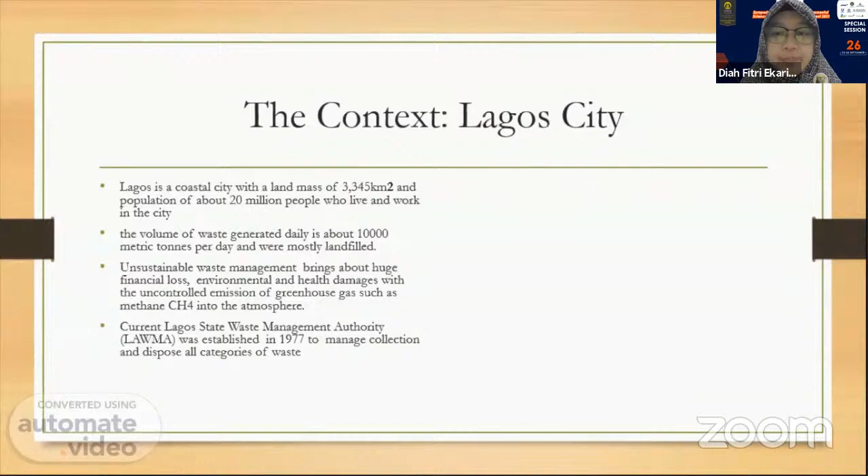Let's look at the context of Lagos city. Lagos State is one of the 36 states of the Federal Republic of Nigeria, and it is a coastal state and a coastal city with a population of over 20 million people who live and work in the city. The volume of waste generated in Lagos State daily is like 10,000 metric tons per day, and previously, most of this waste was mostly landfilled.

However, unsustainable waste management in Lagos State, Nigeria, brings about huge financial loss, environmental and health damages, with the uncontrolled emission of greenhouse gases such as methane and other forms of gases that tend to affect the environment negatively.

Because of that, the Lagos State government established what we now call the Lagos State Waste Management Authority, initially in 1977, preparatory to the popular Festac 77 - the Festival of Arts and Culture held in Africa with Nigeria playing host, and Lagos was the city of the cultural festival at the time. There was so much waste that the government decided to clean up the city, and so the Lagos State government established the Waste Management Authority in 1977.

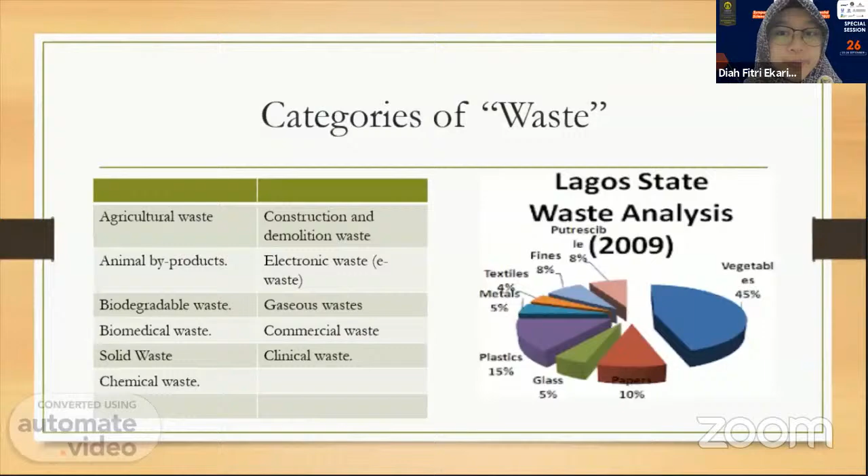This was generated by the Lagos State Waste Management Authority, with vegetable waste constituting 45%, paper waste 10%, then glass, plastics, metals, and textiles in that order. Part of the challenge we have in Africa, particularly Nigeria, is that the food culture tends to generate more waste than other forms. Not only that, industrial waste is high because Lagos is the most industrialized city in Nigeria, and therefore it constitutes the highest form of waste. Particularly, e-waste - electronic waste - is also rising on the horizon.

So, how do we now turn waste to wealth?

They have a lot of waste to contend with, particularly the food waste that are rampant in the society. So the Lagos State Waste Management Authority developed plans with manufacturers in the food and beverages sector to begin to convert the food waste into wealth. There's also the issue of voluntary waste reduction practices across all sectors that are going on.

But mostly the collection of waste from domestic, industrial, hospital is directly under the Lagos State Waste Management Authority. But because of the huge population of Lagos State and Lagos City, it has been so challenging for the Authority to effectively handle prevention, reduction, reuse, recycling, recovery, and the disposal of waste, which should just be the least consideration in terms of waste management.

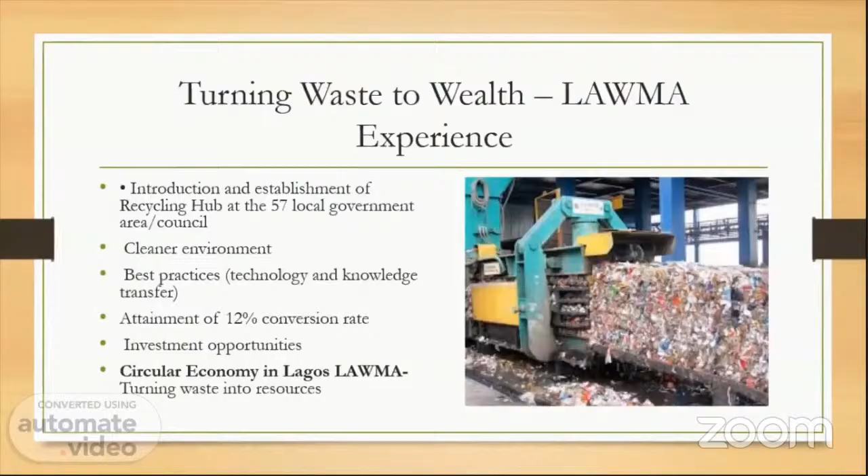And so you can see on my screen here a plant in the Lagos State that is trying to convert the plastic waste into wealth. So you see that this is taking place in some parts of the state, and therefore, the percentage of conversion is relatively low, with 12% conversion rate currently happening in the economy.

But the goal of the Lagos State Waste Management Authority is what we call the circular economy, and we are going to listen to a video clip on the circular economy in Lagos State now.

Look around you. There is waste everywhere you turn. From PET bottles to paper, we are surrounded by waste from products that we consume.

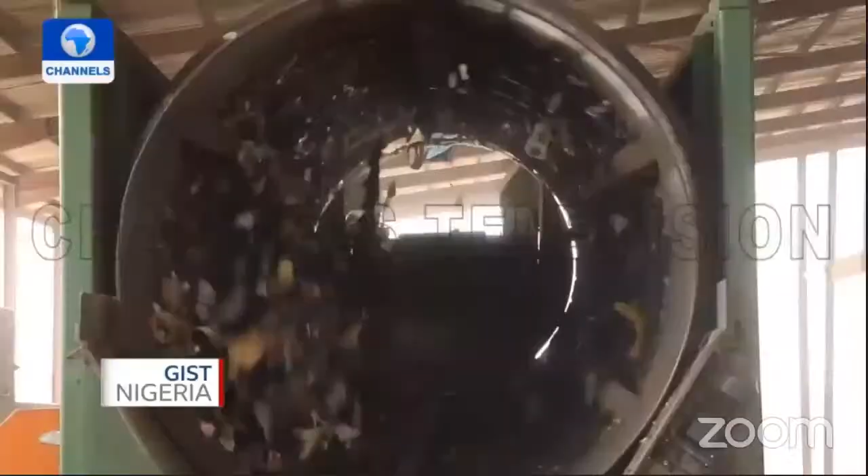The current thinking about product life cycle is fundamentally linear. Products are produced from raw materials, we consume them, and they become waste. Most times, this waste is not properly disposed. The ones that end up in landfills like these are unsorted. Some are burnt, polluting the air and causing danger to our health and the environment. Others, especially plastics, will take hundreds of years to degrade.

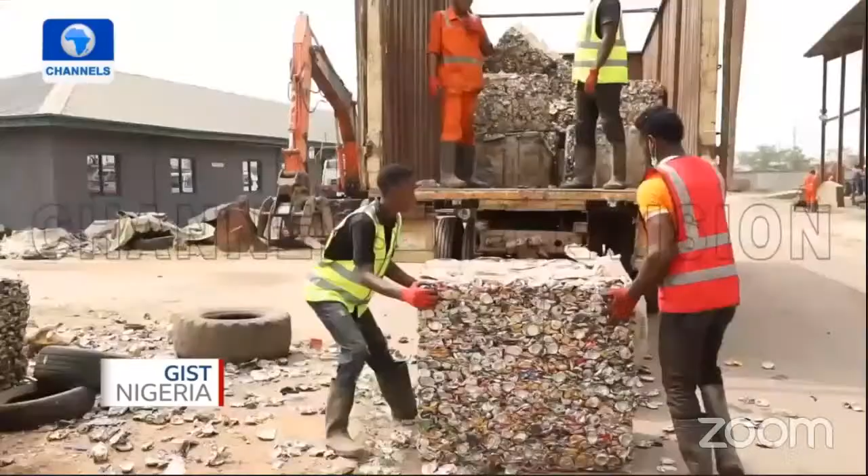But one Nigerian is changing the narrative. Lolade Oresonwo runs a UK company leading an effort to achieve zero waste at landfills in Nigeria. In the last 6 years, this facility has been putting back 1 million kilograms of waste into the production economy every month. Women form 70% of its workforce. It's not just creating wealth, it's actually solving an environmental and a health problem.

If you recycle the waste, then you don't have problems with leachates, with groundwater contamination. So it's a no-brainer that they need to start taking seriously. All over the world, this linear product life cycle is no longer sustainable. Products are now designed in such a way that they are cycled and reused, which means that your waste is a raw material for another product. The World Economic Forum estimates this new economy to be worth $4.5 trillion.

But the Nigerian consumer market today shows little signs of maximizing this opportunity. It is an absolutely huge business. As we stand now, we're creating jobs for at least 3,000 people. That is one company. Now imagine the amount of cottage industries that come out of this place.

What waste are you looking at over there? There's plastic, there's paper, there's metal, there is aluminum cans, ferrous and non-ferrous metals in it. And there is earth in it, earth that can be reconverted to compost. Why are we buying inorganic fertilizers when we can make organic fertilizers from our waste? What you are having is an end-to-end process that you don't even see waste. That is the idea of zero waste.

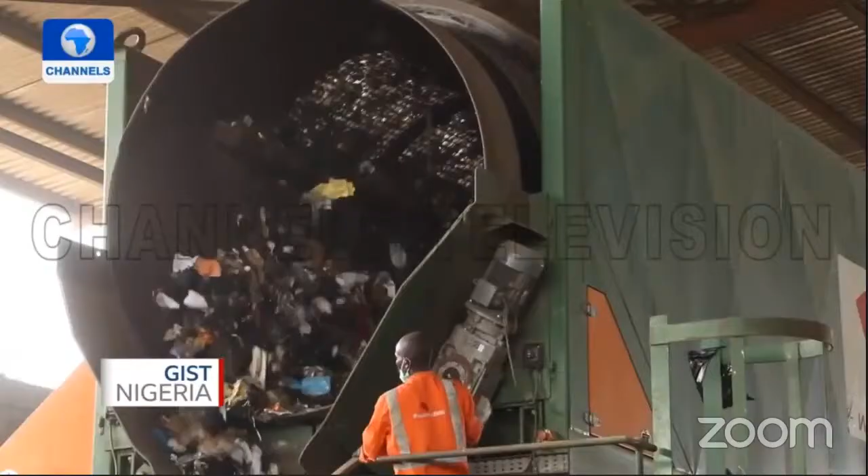In 2019, Nigeria, in partnership with Global Environment Facility and the United Nations Environment, launched a $15 million initiative to recycle electronic waste. While this sits within the circular economy approach for the electronics sector in Nigeria, there is no clear policy on whether such an effort will be extended to other sectors of the economy.

What are the benefits, key benefits of sustainable waste management?

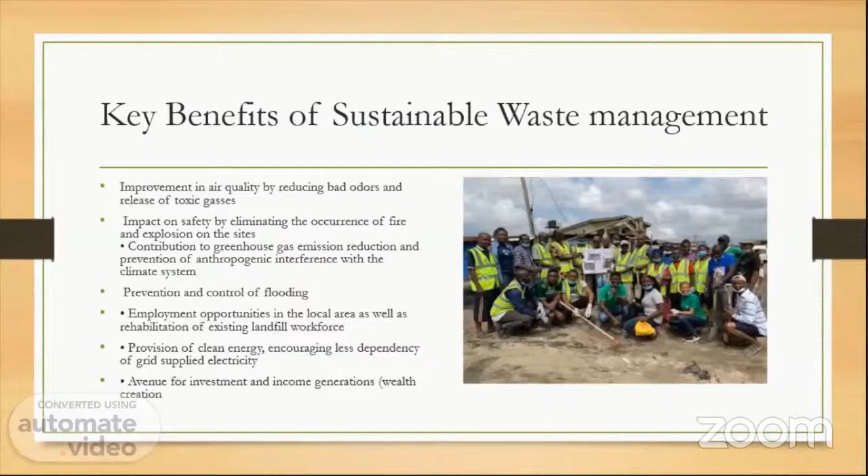By and large, waste management has high economic value. It contributes to the growth of the economy, and not only that, it also creates employment. It creates a friendly environment, and it brings about total well-being of man. And so if we can manage our waste successfully in this part of the world, then we are also creating quality life for the citizens and for the global community by extension.

Let's look at another video on how e-waste, particularly waste created through computers and so on, has been managed in Lagos State so that we can have a reduction of crisis in the environment as well as add to the economy of the country.

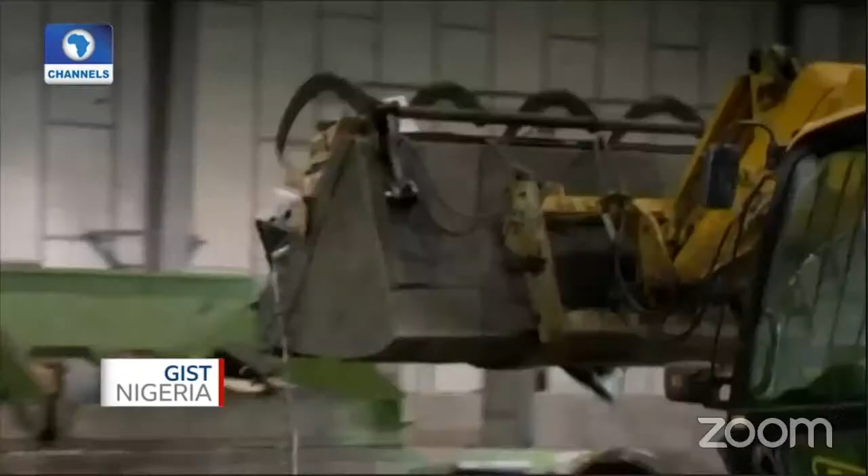According to the United Nations Environment Programme, over 500,000 tons of discarded appliances are processed in the country annually. In most cases, when the e-waste ends up here, residents who are out to make some quick cash scavenge the waste with their bare hands at the risk of their health. Up to 100,000 people work in the informal e-waste sector in Nigeria.

I want to meet Usman Sani, who has been picking e-waste off dump sites for 5 years. How much money do you make in a day? 4,000 naira. That's about $11.

So who do you sell all this to? A customer comes here and buys them from you. Even though this may not look like a very big business for scavengers like Usman, there are Nigerians who have made a lot of profits from electronic waste.

Isaac Egu is an e-waste merchant who has been in the business for the last 15 years. He depends on scavengers like Usman for his supplies.

So how big is your business? By this I mean, how many people do you have in your employ? I have like 10 people working with me, and they work from Monday to Friday. So on an average in a month, how much profit do you make in this business? I make like 200,000. That is more than $500. It looks like the country is gradually seeing the money side of the e-waste.

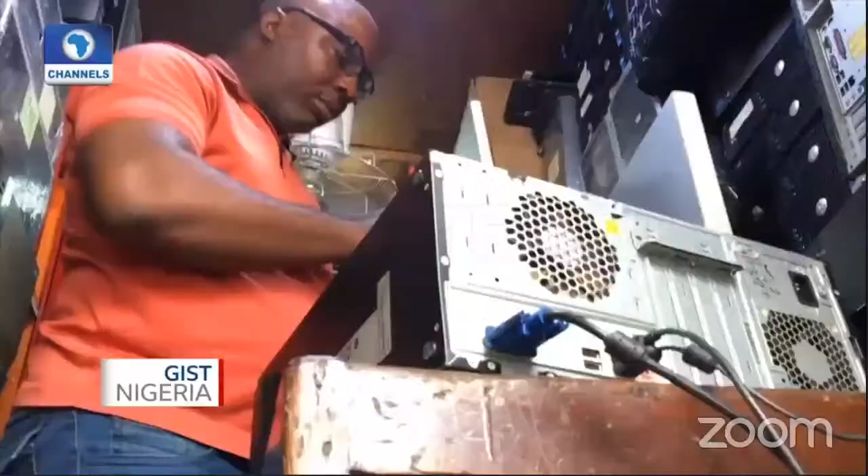With fast technological advancement making many of these electronics obsolete, chances are they would end up in a dump site. How much do people know about the economic potential in e-waste, along with the dangers associated with continuous exposure to such waste? There is no better place to find out than Nigeria's own Silicon Valley, known as the Computer Village in Lagos. Maduka Anthony has been selling and repairing old electronics but has no idea how big the business of unusable electronics is.

How do you dispose of your electronic waste? We don't have any specific or defined means of disposing of electronic waste. The only people we dispose it through are those, I'll call them cart pushers. They normally go around asking for scraps, those that we are unable to fix and get working again. We sell it off to them at peanuts.

Now, are you also aware that this e-waste can be mined for precious metals like gold, silver, copper, platinum? Not really. I'm not much aware of it.

Apart from some of those cart pushers, most of the time after gathering this waste, they have a dump ground. After gathering those stuffs, you see them in the evening extracting some vital components from it. While many developed countries are shipping their e-waste to less developed countries, some business-minded people in countries like Nigeria import the e-waste for its economic value. Kunle Falai, BBC, Lagos, Nigeria.

Ultimately, our goal is to have a cleaner Lagos and also a cleaner global environment. However, there are certain challenges that mitigate against effective waste management in Lagos State, as in other African countries. One is the control that the government holds, not having the right enabling environment. There's also the issue of growing population, not to talk about the paucity of funds created by the economic crisis in the system, and lack of access to equipment or capital to enhance a quality environment. These are some of the challenges, and it is believed that if we effectively provide policy and support, we can effectively manage waste.

The application of blockchain technology in space activities can be carried out in the following areas: financing of space startups and asset creation, tokenization of space assets not for investment purposes, tokenization of requirements for data of remote sensing of the Earth, information management on the full cycle of a space mission, secure satellite communication, creation of virtual security zones of different levels, public procurement in the space industry, and ensuring cybersecurity of space assets through supply management.

According to the carried out content analysis, it is possible to build a classification of environmental risks arising from space activities. Four groups are identified.

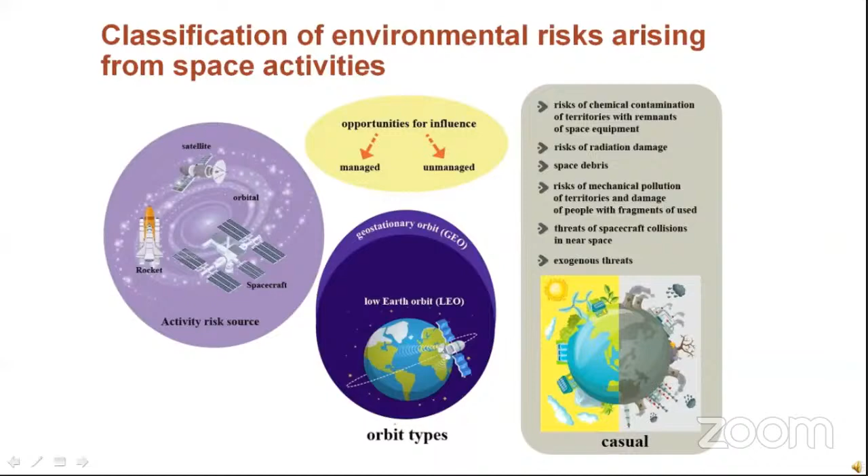The problem of space debris is gradually becoming increasingly important for the future use of outer space. Many simulations based on evolved modeling assume that the number of objects in orbit will increase non-linearly, even if no new objects are added to space, due to collisions caused by existing debris.

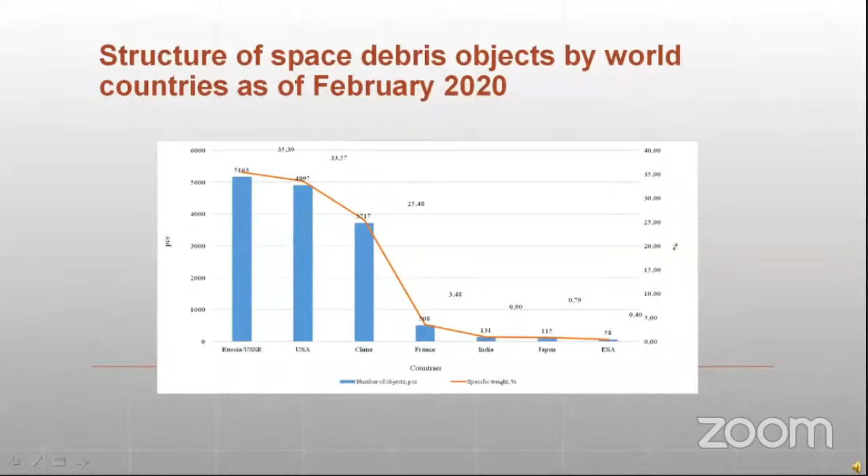Ukrainian national legislation in the field of space activities is at the stage of harmonization with international space agencies. There are still many insufficiently substantiated items: improvement of the technical regulations for space activities, the procedure for liability insurance for damage caused to a space object, as the relevant insurance contract must be one of the documents required to obtain a permit to fulfill the international obligation of the state to be responsible for any national space activities.

Standards and guidelines of international organizations in the field of space sustainability: the maximum service life of the equipment in orbit at an altitude of up to 2,000 km should not exceed 25 years, after which it must be disposed of.

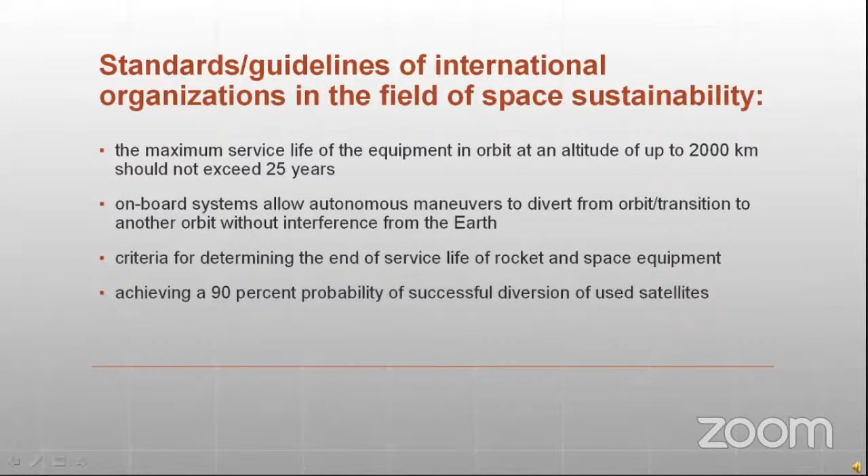Compliance of the technological capabilities of the platform, the extent to which onboard systems allow autonomous maneuvers to divert from orbit or transition to another orbit without interference from the Earth. Criteria for determining the end of service life of rocket and space equipment, achieving a 90% probability of successful diversion of used satellites, and analysis of the operation of large satellite groups, etc.

The specifics of the proposed model is that the data subject to analysis have both qualitative and quantitative characteristics. The advantage of the model is the compactness of development due to the use of one platform and the efficiency of use due to the absence of the need to reload data into a specialized system.

The main benefits from the introduction of Agile management according to the results of the Boston Consulting Group study are: cost reduction by 25–35%, improvement of product and service quality by 20%, and acceleration of creation of new products and services by 100–200%.

In the 21st century, the concept of clean space has emerged at the global partnership level. This initiative has three directions: eco-design, design of projects to address the impact of space debris on the environment; CleanSat, design of measures to reduce the formation of space debris; and e.Deorbit, removal of large space debris from orbit.

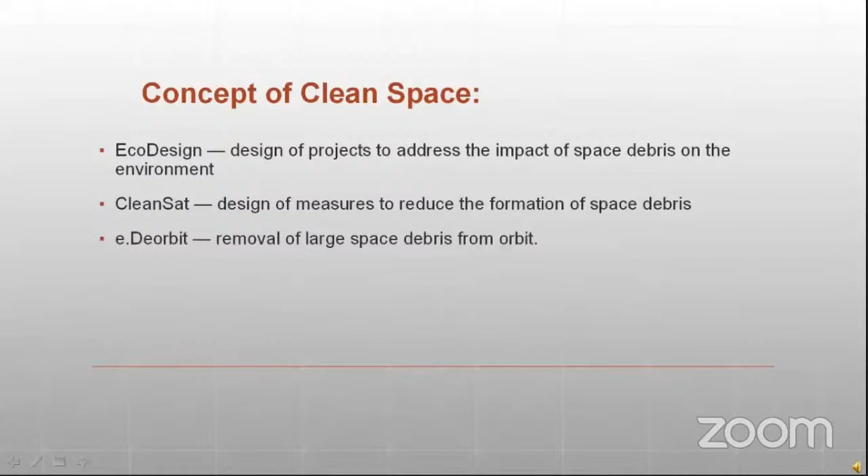The graphic interpretation of components comparison of SWOT analysis of the rocket and space industry development is built. It is found that the weak side and threat to the activities of the aerospace industry is the insufficient funding of implemented projects and inefficient distribution of finances between its components, science and production.

It is proposed to use blockchain technology as an effective tool for cybersecurity of space objects. Possibilities of Agile management as a means of overcoming barriers to the introduction of innovative decisions in space activity are considered.

The ecological risks from space activities that affect the Earth's ecology are analyzed. It is proven that the prevention of serious environmental consequences and minimization of the negative impact of the above threats require the introduction of environmental management systems in the system of space activities.

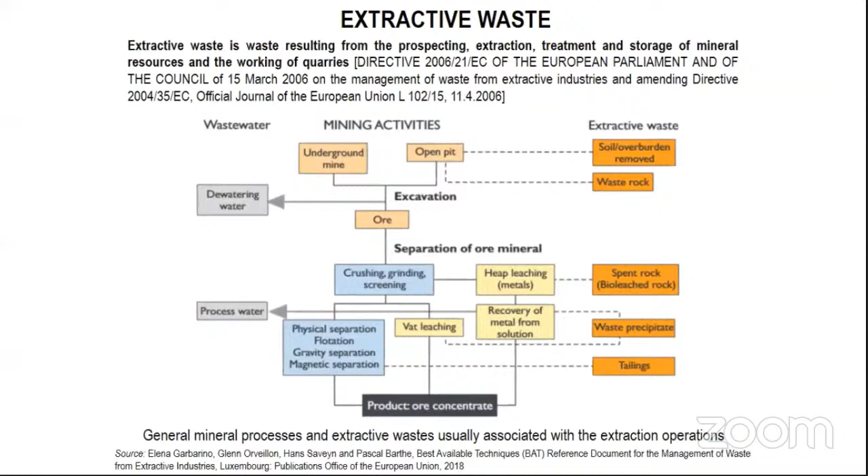Extractive waste is waste resulting from the prospecting, extraction, treatment and storage of mineral resources and the working of quarries. Extractive waste may be solid waste such as waste rock, contaminated overburden, smelter waste, solids from physical beneficiation and separation processes, dry flotation tailings, as well as waste from industrial minerals, cutting and sawing, waste sand, etc. Slurries, mainly flotation tailings, waste effluents, mine drainage, especially acid mine drainage, also processing water.

Amounts and type of waste vary strongly across countries depending on several factors, including extracted mineral, geological conditions, mining and processing techniques applied. A residual to product ratio can be defined which reflects the relative amount of residues generated during the extraction process in order to extract one unit of mineral product.

Typically, for surface extraction of base metal bearing ores, this ratio varies from 2:1 to 8:1. Usually, this ratio will vary significantly over the time and life of the mine. In underground extraction, this ratio will be usually less than 0.5 to 1.

The relative amount of extractive residue generated during mineral processing is closely linked to the type of mineral resources processed, the ore grade, and the technology used. This ratio ranges from 1 to 1 for extraction of alumina from bauxite, through 500 to 1 for nickel and surpasses 900,000 to 1 in the case of gold and platinum group metals.

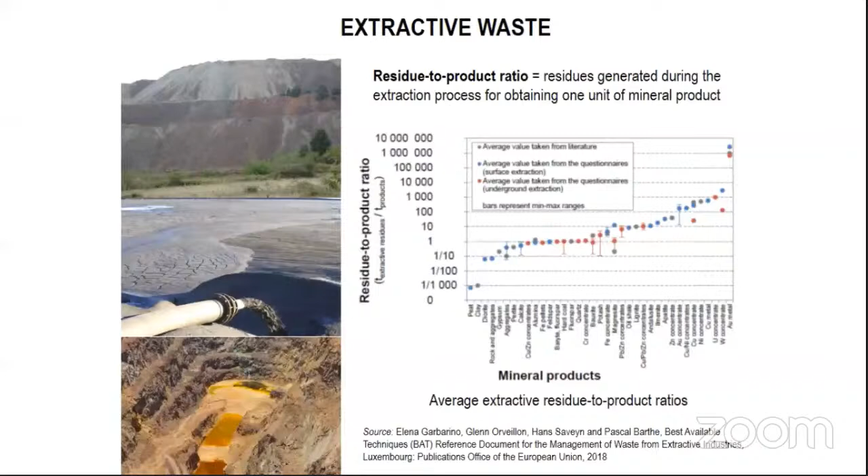The total amount of extractive residues generated can be defined as the sum of all the extractive residues generated during the different extractive processes. Key issues related to extractive mining and mineral processing waste can be classified as shown here: safety and stability. Measures have to be taken to confine and contain the extractive waste in the area designed for that purpose and to ensure the structural stability of the extractive waste and the confining structure, dam or heap. Eventual collapse of any type of extractive waste facilities can have short-term and long-term effects.

Typical short-term consequences might include dangerous flow slides, release of hazardous substances, flooding, crushing and destruction, cut off infrastructure, poisoning. Potential long-term effects might include metal accumulation in plants and animals, contamination of soil, contamination of groundwater, loss of animal life, adverse effect on human health.

Non-inert extractive waste might undergo significant physical, chemical or biological transformations which in turn might have adverse effects on the environment and human health. Examples include formation of acid rock drainage or neutral rock drainage, leaching of metals which might pose a risk of soil, water and groundwater contamination, migration of pollutants from the extractive waste, for example, cyanides contained in waste produced during gold extraction, spontaneous combustion in the coal and lignite or metalliferous ores extractive industries.

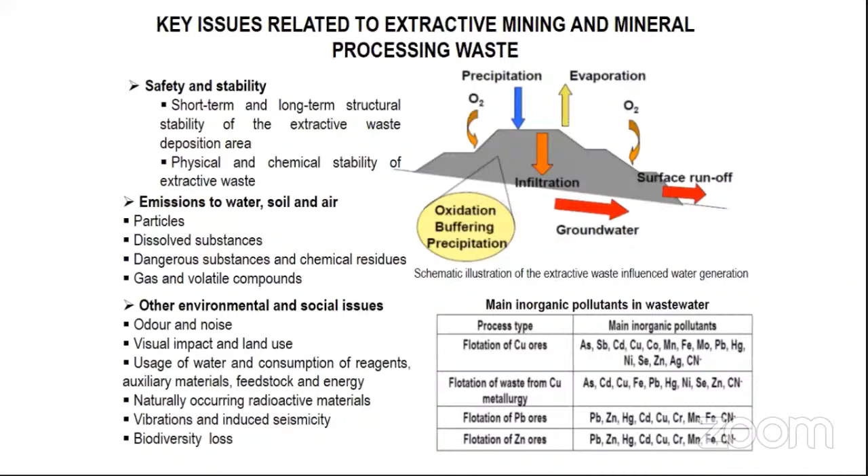Other environmental and social issues include odor, noise, visual impact and land use, usage of water and consumption of reagents, vibration and induced seismicity, biodiversity loss, etc. Some illustrative data for the pollutants follows.

Sustainable development is development that meets the needs of present generations without compromising the ability of future generations to meet their own needs. To achieve sustainable development, it is crucial to harmonize three core elements: economic growth, social inclusion, and environmental protection. When sustainable mining and mineral processing is considered, all the above mentioned key issues related to mining and mineral processing waste have to be considered.

The waste hierarchy has to be followed and the best available technologies used. In order to prevent the generation of solid extractive waste, one should use one or a combination of techniques appropriately selected from: pre-sorting and selective handling of extractive materials that in principle qualify as byproducts or products; placing extractive materials that do not qualify as byproducts or products into excavation voids; using extractive materials that in principle qualify as byproducts or products for internal or external purposes.

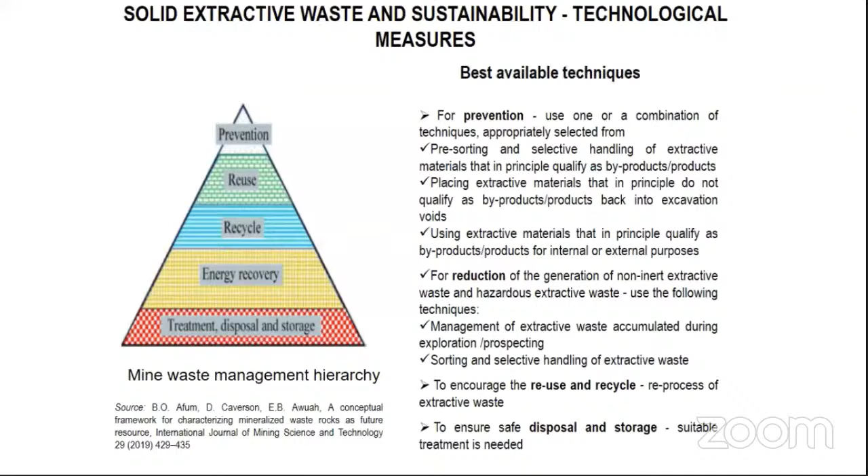In order to encourage the reuse and recycling of solid extractive waste, that is to reprocess the extractive waste. This requires initial characterization of the waste using international standards. In order to ensure safe disposal and storage, suitable treatment is needed, for example cyanide destruction before solid waste dumping or piling.

Extractive waste is a potential source of valuable materials that are currently not recovered routinely, including critical raw materials. The potential for recovery from extractive wastes depends on the volumes of the waste and the metal concentrations in the waste. Increased recovery from extractive waste reduces the need for active or passive treatment and storage of that waste and the associated environmental impacts. It also decreases the need for primary extraction.

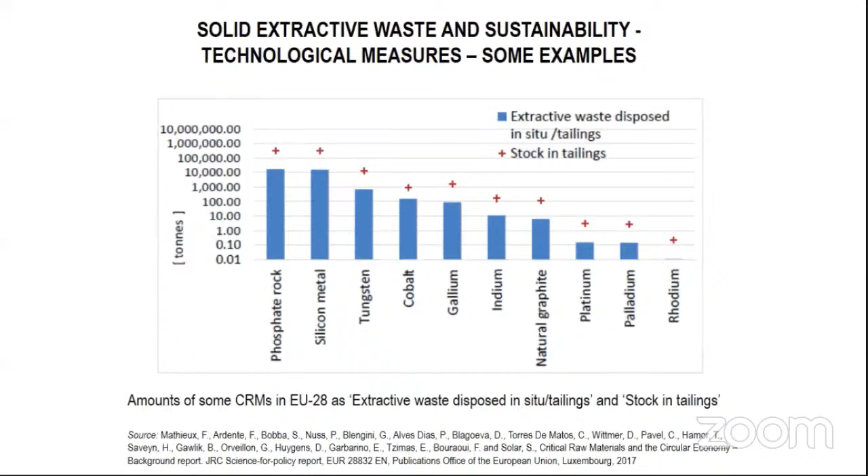Extractive waste is usually reprocessed by applying mineral processing techniques. Site rehabilitation is achieved besides recovery of valuable raw materials.

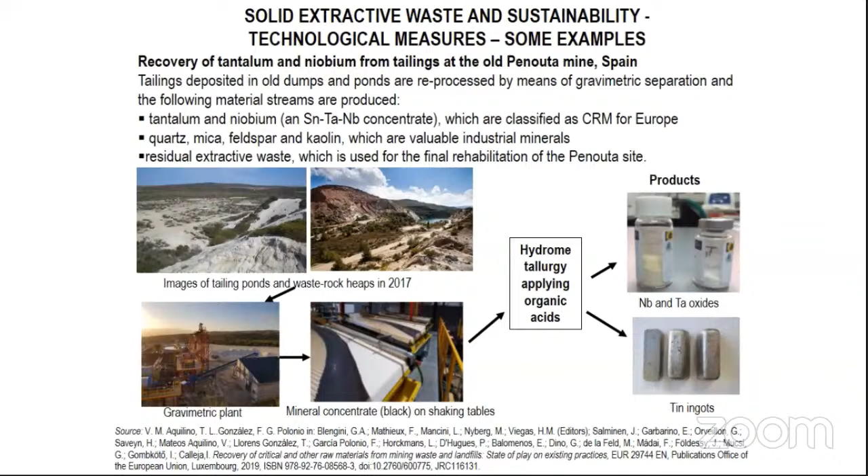Some examples of extractive solid waste handling: recovery of tantalum and niobium from tailings. Tailings deposited in old dumps and ponds are reprocessed by means of gravimetric and low-intensity magnetic separation. The following material streams are produced: tantalum and niobium; quartz, mica, feldspar, and kaolin, which are valuable industrial minerals; and residual extractive waste, which is used for the final rehabilitation of the site.

Recovery of critical raw materials and valuable metals from inorganic industrial waste streams: the project focuses on the recovery of chromium, vanadium, niobium, and molybdenum from stainless steel slag, carbon steel slag, and ferrochrome slag, without impairing the properties of the residual matrix material for valorization as aggregates and fillers in the construction sector. Improved mineral processing and hydrometallurgical technologies are mainly applied.

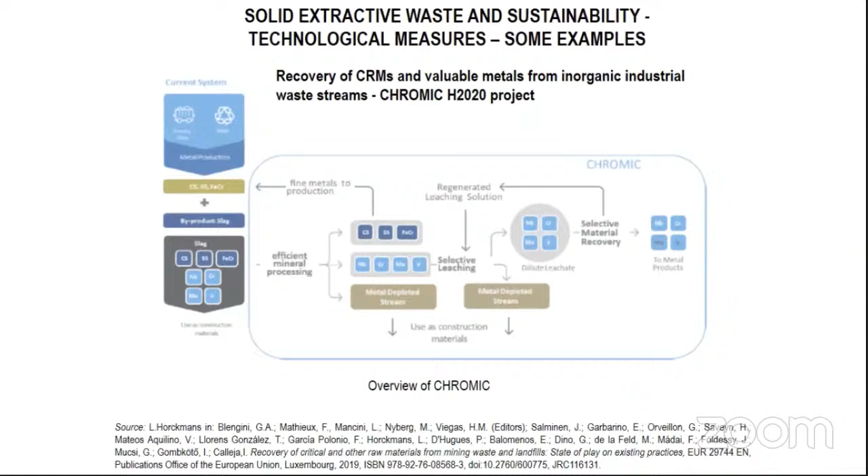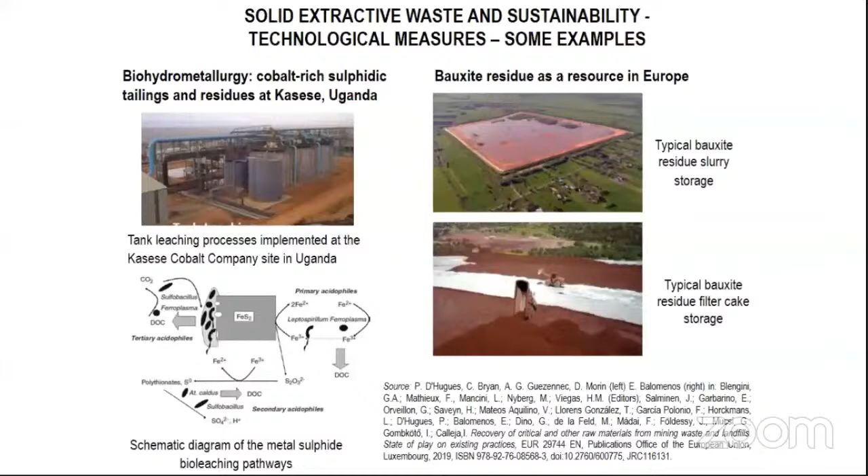Bauxite residues are produced as red slurry and contain significant amounts of iron, aluminium, silicon, and titanium oxides, as well as smaller concentrations of critical and industrially important metals such as vanadium, chromium, gallium, rare earth elements—mainly cerium, lanthanum, yttrium—niobium, and scandium. Here results of some of our experiments on extraction of valuable metals from mixed extractive waste are presented.

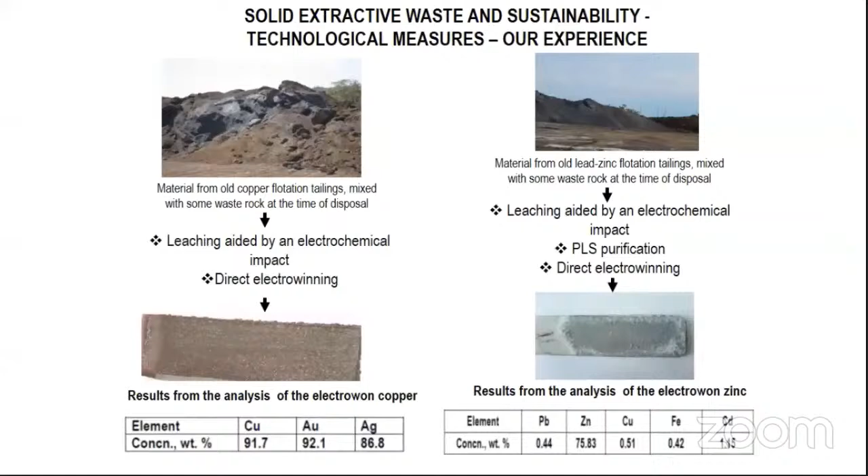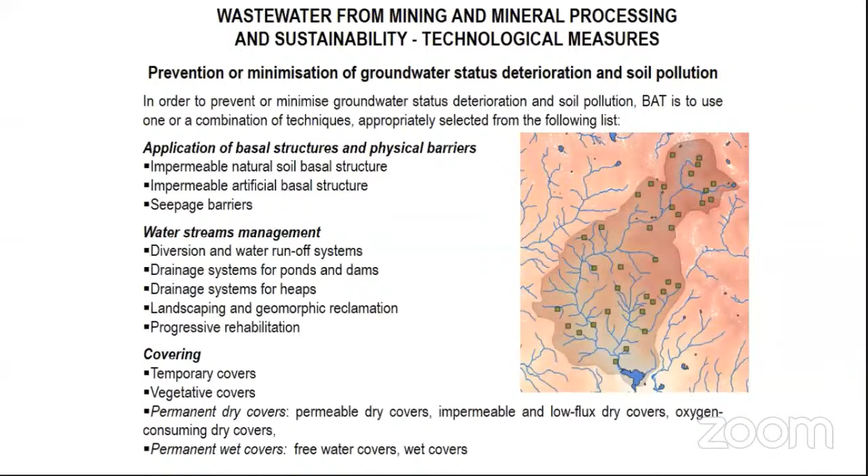Application of different coverings: temporary covers, vegetative covers, permanent dry covers, or permanent wet covers. Some other measures for prevention or minimization of groundwater status deterioration and soil pollution are use of special technologies such as permeable reactive barriers for radionuclides, metals or metalloids, and phytotechnologies for metals, metalloids and radionuclides control. Last but not least, monitoring of emissions to soil and groundwater are needed, including leakage detection systems underneath the impermeable basal structure, seepage detection systems, and control wells.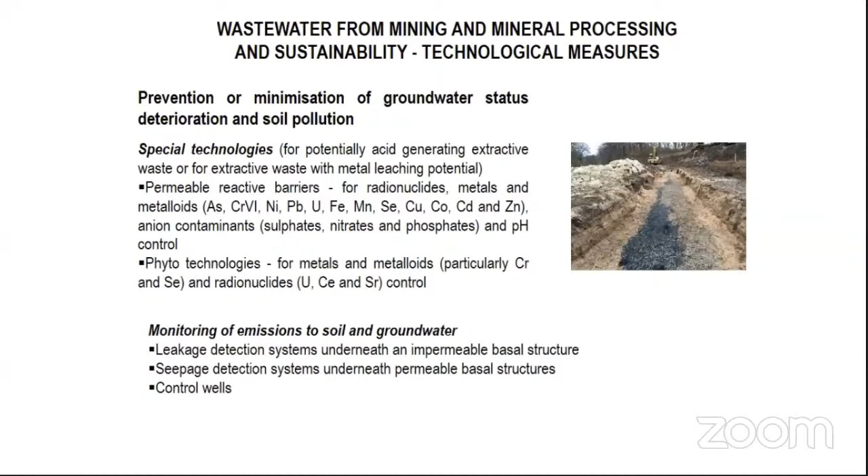Prevention or minimization of surface water status deterioration can be achieved by prevention or minimization of extractive waste influenced water generation, reuse or recycling of excess water in extraction, mineral processing, or extractive waste management. Measures include installation of thickeners, filter presses, diversion of water runoff systems during operation, and coverings of different types: temporary, vegetative, permeable, impermeable, etc.

Prevention or minimization of emissions to surface water include drained wastewater collection and handling, and collection and off-site treatment of wastewater. Removal of suspended solids or suspended liquid particles are other measures. They can be achieved by gravity separation, clarification, coagulation and flocculation, air flotation, media filtration, membrane filtration for suspended particles, and hydro-cycloning.

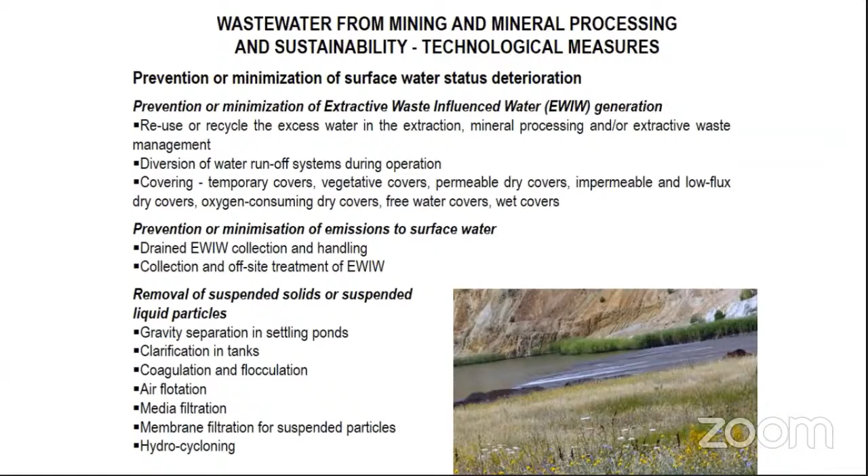Further measures for prevention or minimization of surface water status deterioration include removal of dissolved substances by using oxidation-based systems such as aeration and active chemical oxidation, active aerobic oxidation, aerobic wetlands, use of different reduction-based systems using bacterial activity, application of chemical precipitation and co-precipitation, adsorption, ion exchange, and membrane processes such as nanofiltration and reverse osmosis. Neutralization of wastewater prior to discharge is also needed, which includes active or passive treatments. Last but not least, monitoring of emissions to surface water is required. Monitoring parameters and frequencies are selected according to site-specific conditions, extractive waste characteristics, and local environmental conditions.

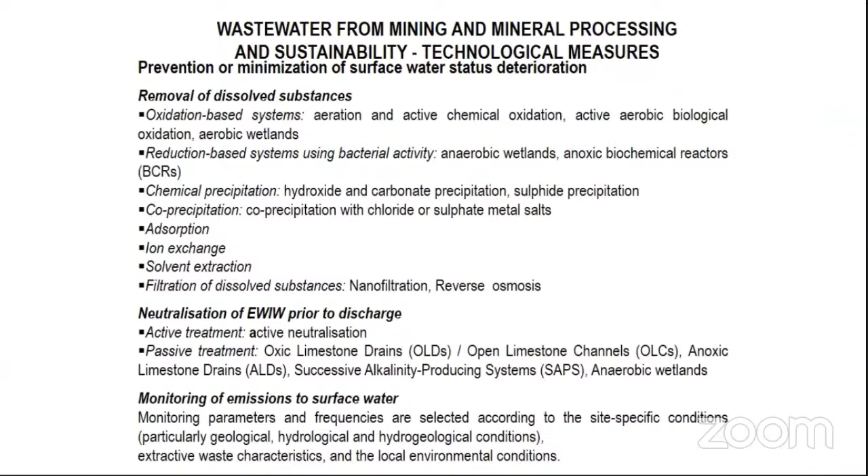Some words for emerging techniques contributing to sustainable mining and mineral processing. They include techniques for improving extractive waste characteristics, dewatering by geotextile tubes that allows the dewatering and containment of slurried extractive waste for mineral processing with high water content, passivation, microencapsulation, and biological treatment. Passivation or microencapsulation of acid-generating extractive waste involves protecting the sulfide surface from water and oxygen. Biological treatment consists of injecting and distributing inoculants and substrates to form a biological film that wraps the material particles.

Techniques for preventing and minimizing groundwater status deterioration and soil pollution include reactive basal structures. The technique consists of adding alkaline materials as a neutralizing basal layer underneath the extractive waste to neutralize the seepage and reduce acid rock drainage generation potential. Accelerated and controlled dissolution of extractive waste is a technique suitable for waste from mineral processing of potash. Phytomining uses plants to take up contaminants with the transpiration stream.

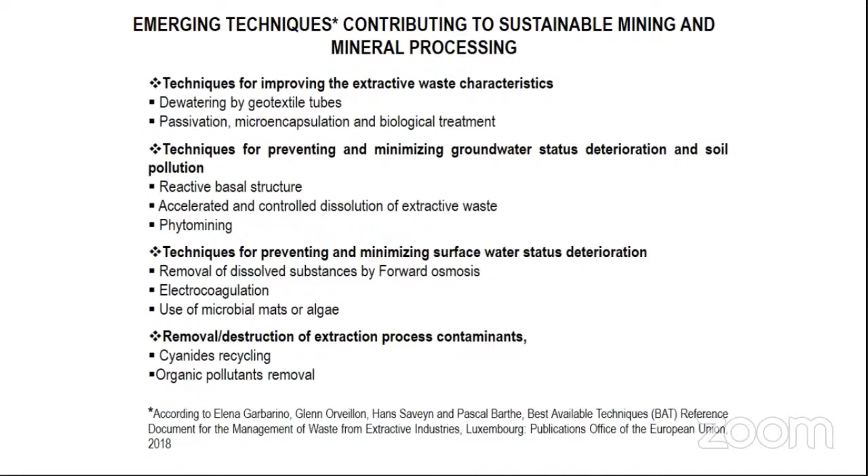Another measure is removal or destruction of extraction process contaminants, for example, cyanide recycling by membrane and electrowinning technologies, which allow for the recovery of metallic copper and the simultaneous liberation of free cyanide from the copper cyanide complexes, or the extraction of organic pollutants that can be achieved by anodic oxidation.

Our experience: a technology for electrochemical recovery of copper and arsenic from washing acids. The treatment proposed is based on effluent electrolysis and subsequent processes. Real washing solution from a copper smelting plant in South America was treated with initial pH 0.3-0.5, containing arsenic 10 grams per liter, copper 30-40 grams per liter, nickel 1 gram per liter, and sulfides around 2 grams per liter. The solid obtained after treatment contains 85-92% copper and about 3% arsenic. Arsenic is actually eliminated as a harmless substance and in a state suitable for further utilization.

Heavy metals removal from wastewater through electrochemical treatment: wastewater from non-ferrous metallurgy is treated. The method is based on electrolysis, electrocoagulation, electroflotation, precipitation, and co-precipitation processes.

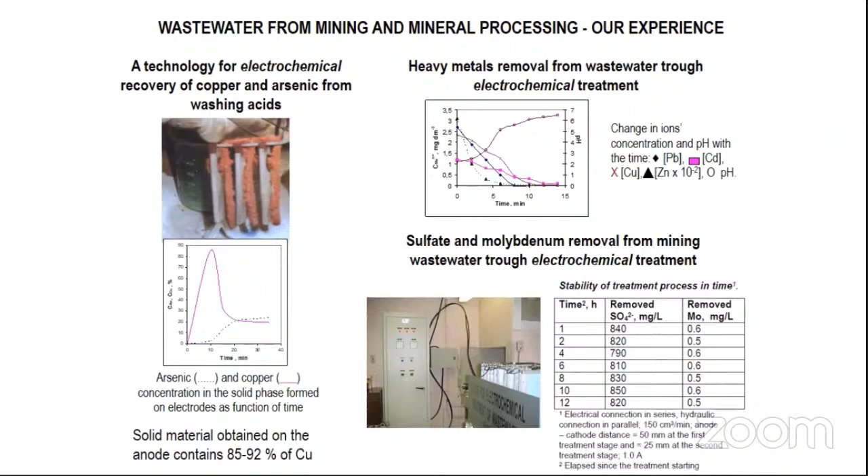Sulfate and molybdenum removal from wastewater through electrochemical treatment. The method is based on electromigration, electroosmosis, electrolysis, and subsequent secondary processes. The concentrations of sulfate and molybdenum were decreased from around 2 grams per liter to 1 gram per liter, and from around 2 milligrams to 0.8 milligrams per liter correspondingly. The pH of the treated water was around 8.

In conclusion, our society will not be able to continue its development and well-being without sustainable mining and mineral processing activities. This means also strictly observing the hierarchy of extractive solid and liquid waste management, namely pollution prevention at all potential sources on the mine and mineral processing sites, minimization of potential negative impacts on the environment by mitigation measures, reduction of water consumption, reduction of reagents and auxiliary materials consumption, reduction of energy consumption, recovery and beneficial use of

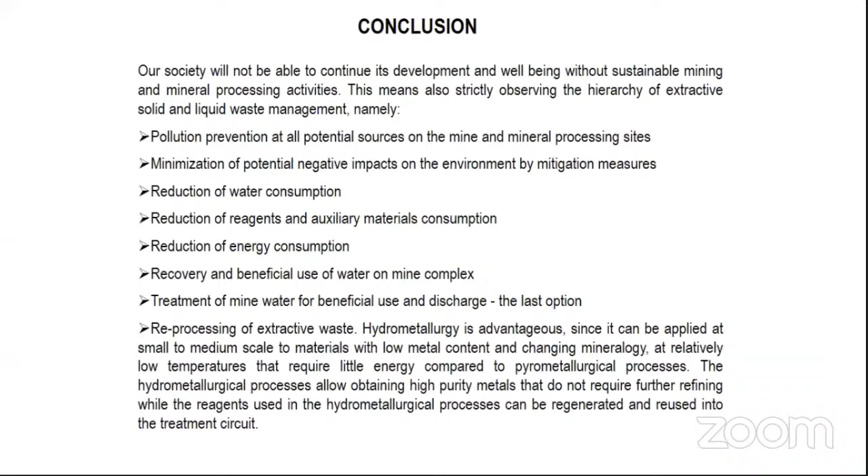water on mine complex, treatment of mine water for beneficial use and as the last option, discharge. Reprocessing of extractive waste. Here, hydrometallurgy is advantageous in this case, since it can be applied at small to medium amounts of waste with low metal content and changing mineralogy at relatively low temperature that require little energy compared to pyrometallurgical processes. The reagents used in the hydrometallurgical processes can be regenerated and recirculated into the circuit of treatment. The hydrometallurgical processes allow obtaining high purity metals that do not require further refining.

Thank you for your attention. Yes, it is possible, and we have to do it. Any questions?

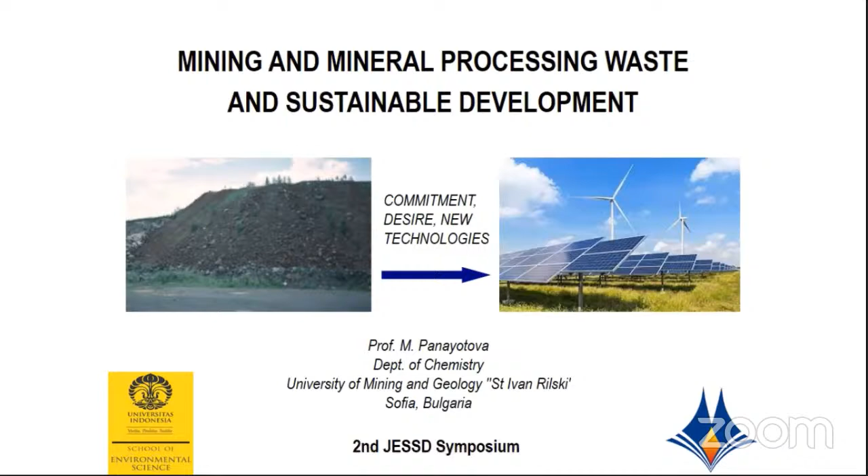Thank you very much for your answer, Professor Panayotova. That concludes our special session today. From the speakers' presentations, we can see that other countries are also facing environmental challenges, such as waste management in Lagos, Nigeria, environmental risks arising from space activities, and challenges in mining and mineral processing waste. It is essential to address these problems from the point of view of sustainable development, considering the sustainability of our environment as well as social and economic aspects.